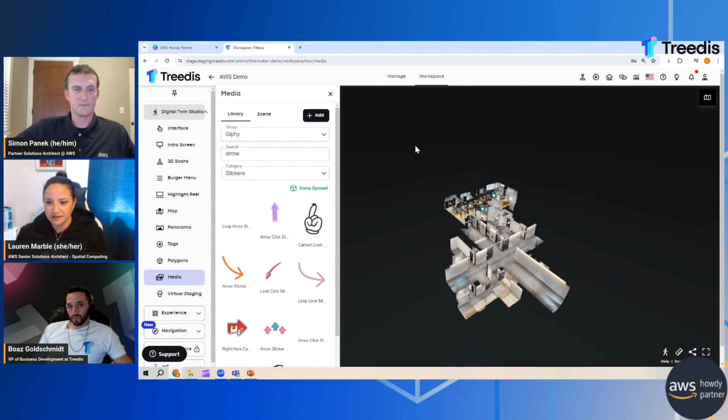Good point. So Treedis, I'm going to run it back a bit. Oh yeah, because I did jump straight into that Giphy thing. It's my fault.

So the Treedis platform, it's okay, you need to add your space. And when you capture a space, Treedis has an integration with Matterport, so we take Matterport digital twins. You would capture your space, upload it to Matterport, and then you have a Matterport link, a URL. When you want to add a space, all you need to do is put in that Matterport URL, which normally starts with my.matterport.com, and then the specific tour.

And then you name it, give it a name. You can also manage a portfolio of clients here. You just add it, and once added, all your tours are here. Then when you click on it, you can start working on it.

Awesome. About how long would you say it took to scan, or do you do the scan? Did you scan this space, or did Matterport scan the space? How does that work? We scanned it. Matterport also have scanning services, so if you want to, they provide what they call a capture service, where you can have a technician come and capture your site.

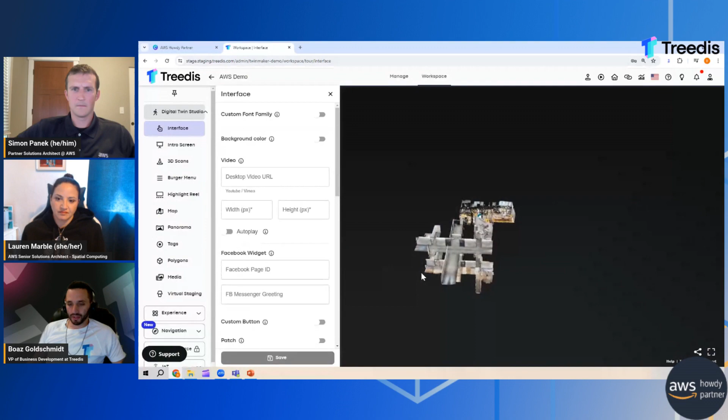It's really quick. I'd say that the office, if I load it again you can kind of see the size of it, this also has a few other floors like the lobby or something. But this didn't take more than like 40 minutes, I'd say, to do the actual scanning with the camera. And then it takes a couple more hours to process and upload.

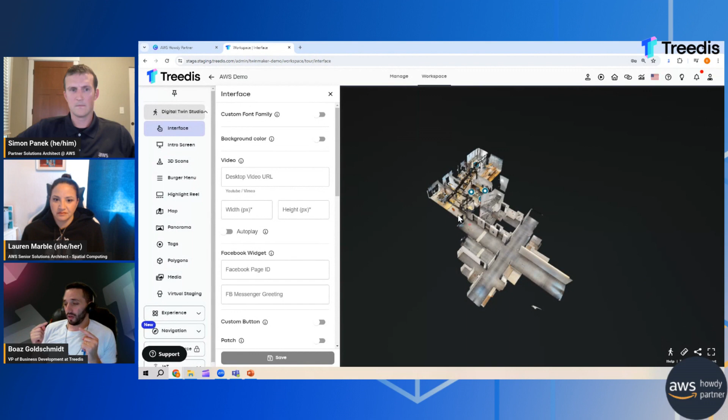But once you have the Matterport link, it doesn't take any time at all to upload to Treedis, it's like a matter of 2 seconds. And then you also have it in Treedis, and you can sync between your accounts so that all your Matterport tours will be there. I know this is pulling from Matterport, and typically you store Matterport scans in Matterport's file format. Can you store those in S3 or some AWS service, or does it have to come straight from Matterport? It has to come straight from Matterport.

Interesting. When you're doing the capture yourself, what kind of equipment are you using? Do they provide a camera? Can you use your smartphone? Matterport does produce hardware, they have a Pro 3 camera, which is actually one of the best cameras out there. But you can also use other cameras like the Ricoh, anything that's able to connect to the Matterport capture app and upload your Matterport space, your Matterport model. They have a list of devices you can use on their website.

Yeah, so we captured our space, uploaded it to Matterport, then uploaded it to Treedis, and now it's on Treedis, ready to work. And then in Treedis, in the platform, we have what we call the workspace, which is kind of where all the magic happens, where all the editing is done, where we create all these things we were talking about in the slideshow. And there really is a lot of features here.

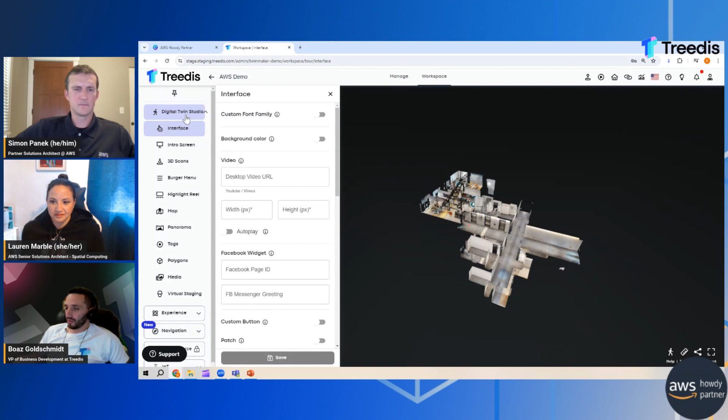Because we understand that one digital twin can provide so many different use cases. You can use the digital twin for training and onboarding, for collaboration tools, for visualization of live data coming from IoT sensors, for indoor navigation. We even have a feature for retail, like an e-commerce feature, which is probably for a different Howdy partner session. But yeah, there's so much to do here, and yet it still feels pretty intuitive and straightforward on how to do it.

I mean, just because we come from the nerdy, not very fun industrial background, feel free to share the fun stuff, the retail stuff. We do have retail partners and customers that'll probably be watching this. So whatever, show us whatever you want, this is your time. Yeah, so I think if we have some time, we can definitely touch on some of the retail stuff at the end.

I wouldn't say it's like the Treedis core focus, but it's definitely something that's on the platform, and we do have users that use it. So I'm going to start with the basics, which is we have this digital twin, and you can see here it's like taking a picture. You kind of freeze a fraction in time, and you have a 3D model out of it, and then you want to start adding the information, adding in these layers and the data.

I think the most simple way to add information is just by adding a tag, where you can see I have a tag here that just gives basic information like coffee or fridge. And to add a tag, we're going to start adding some tags ourselves now. You just go to tags, and then you can place a tag here on the table, and you can name it. Let's call this lunch table, because this is where we eat lunch.

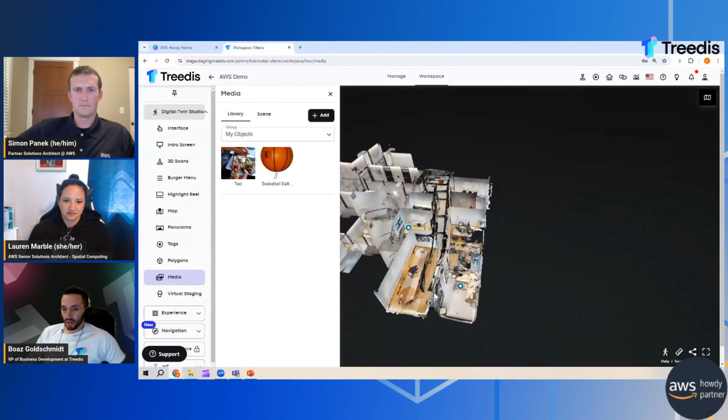Okay, nice. So the office is fairly small, but let's imagine it's huge. We want to know how to navigate through it, and we already added a few tags in the office. So how do we create a navigation tool for users to easily navigate this space? When I say navigate the space, it's both remotely and also physically on site with the mobile device.

For that, we have our navigation feature. With web navigation switched on, users can select a location from the menu and it will show them how to get there - it will navigate them, it will show them the path. How does it look? Let's just open this up here.

So let's say we're looking for the lunch table, and there are different kinds of settings we have here. You can see it's starting to navigate me to the lunch table. Trouble is, it's running me through walls - it's not going through the right area. So it's just going to run me through the wall, and then I'm at the lunch table all of a sudden.

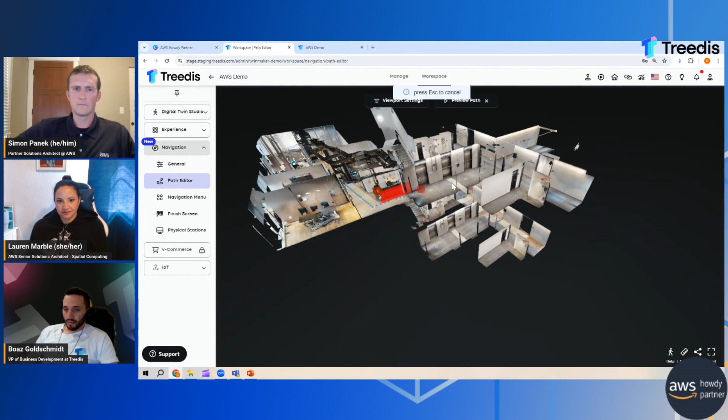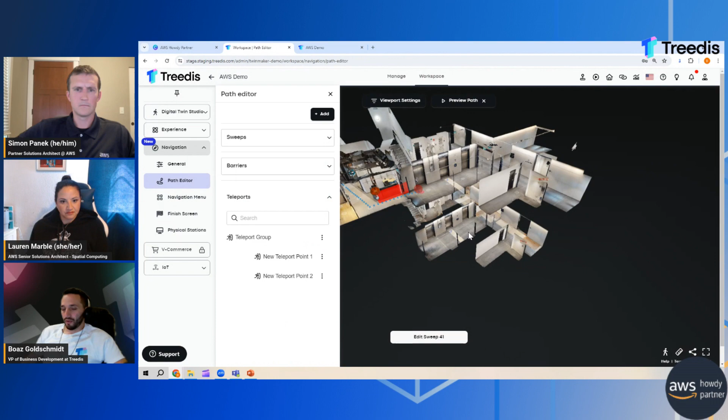We see the elevators in two different floors. And what we'll want to do is make the user teleport from this door to the other door, to the door on the other floor, and see that as a valid route. So what you would do is you would add a teleport group, mark a point, like for example here, and then add another point on the bottom there. And then you can name them - I'll just give them different names so it's easier to understand. And then you have one group, and you know that if the route takes you to this point here, it will continue the route from the other side of the teleport, sort of like a magic gateway, sort of say.

Another possibility to enhance your path is to add scanning points. You can see there's these circles here on the floor that represent the scanning points where the camera captured a 360. So what you can do is you can also add what we call sweeps, or you can modify them.

So for example, if I don't want the navigation to go through sweep number 1, maybe I want it to go through number 4. So I can just delete sweep number 1. Hold on.

What's the use case for this, Boaz? Is this in case a certain sweep has a better view of something you're trying to look at, or what's the idea?

So for example, it might take me through a kind of - I'll show you. Let's take an example from here. Sorry. So for the sweeps, let's do a new preview path. Let's do from here to let's say fridge.

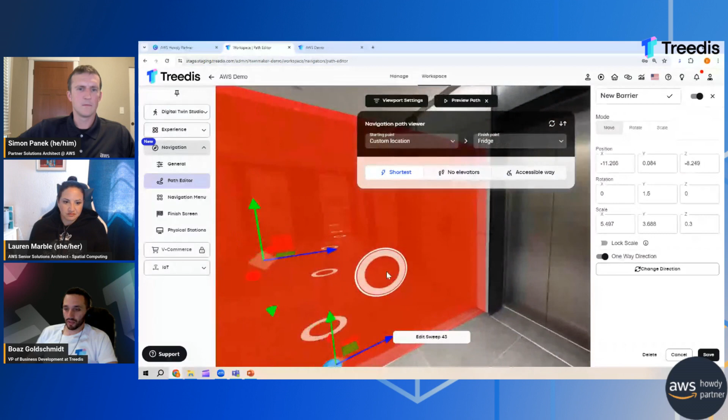Oh, and another thing, we can make the barriers one way. So if there's like a revolving door that you can only access one way, you can actually edit that and make it one way here, for example. And then you see the green way is where you can enter it, and then you can come through the other side. So I can change the direction of that, for example.

So for the sweeps, for example, you can see here that it's kind of taking me here and then going to this one and then sending me back from this kind of route. So I might want to cancel number 41, or I might just want to add a sweep here and say, just connect me through this one.

So that was 39. And then I can edit all the neighboring sweeps of 39, and I can add this custom sweep to make it work with that one. So if I delete all the neighboring sweeps, then it's just going to skip navigating on that sweep. Let's refresh this.

So again, if I go from here to the fridge or coffee, then it doesn't take me back that way. First of all, it doesn't take me through that barrier there. But I can also modify the line - it's basically just for aesthetics, just to make it have the exact location.

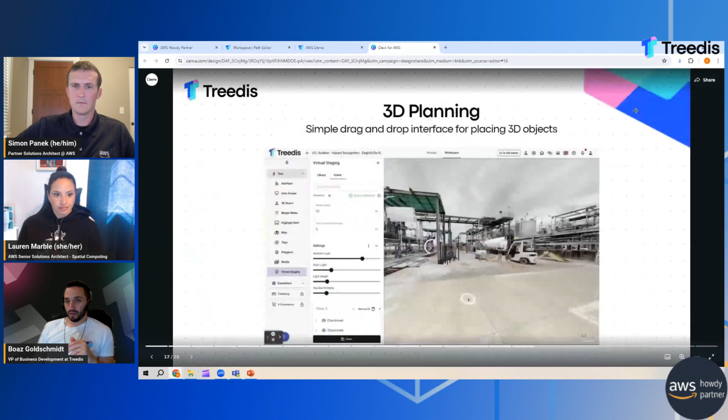The next level, and here you can also see the kind of navigation, the next level of collaboration is, like you asked, remote support. So instead of communicating in a thread, now they're actually going on a live session together with on-screen annotations where someone remotely can say, yeah, you have to pull this screw out, you have to switch this light bulb or so on. And then they're live in it.

And there's also a possibility for, if everyone's remote, then you can have this kind of training session where everyone logs into the digital twin with an avatar representation so that I can see what other people are doing, what they're looking at, where they're walking in the digital twin. So to answer the question, the answer is yes, it's possible. Thanks.

Okay, so we spoke about navigation. Now let's talk about how we build sort of like a training module or a step-by-step guide. And the way to do so is with our experience creator, what we call the experience creator, which I can drop here a teaser.

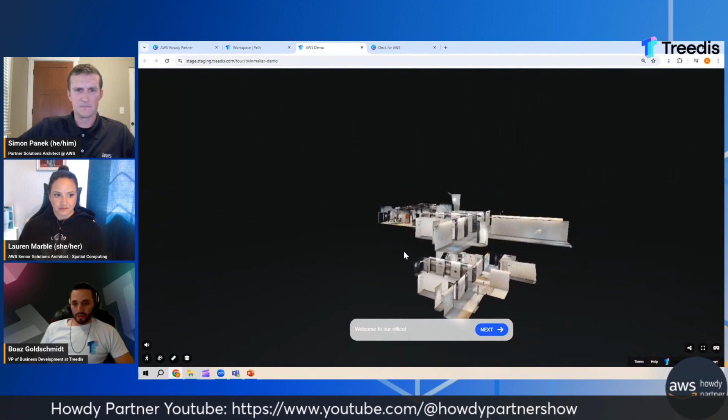Yeah, so there are different buttons there. We can take a look at them now. The first one is the dollhouse, which gives us this preview where you can see the entire model. Then we also have the floor plan - do we have the floor plan here? This one. There's also a floor plan mode, but it's switched off.

And then, yes, there is a possibility to take measurements. So I can click on this measurement tool and add a measurement. Wait... oh, there it is. Where's it gone? So these are, I mean, all these icons are Matterport features.

The measurements tool, the dollhouse, the floors where you can jump from one floor to another. Let's play around with it a bit. One second. Let's refresh this.

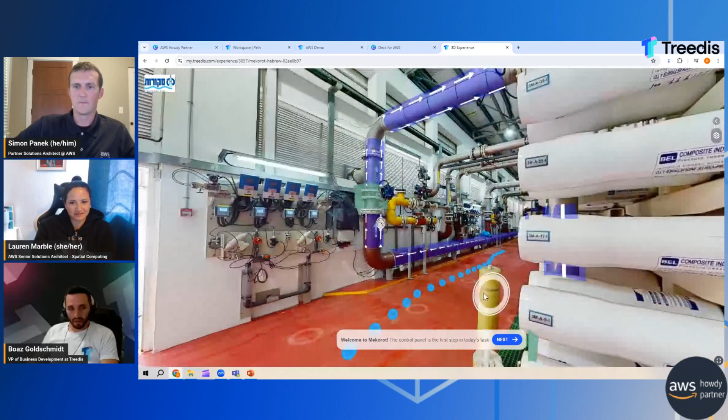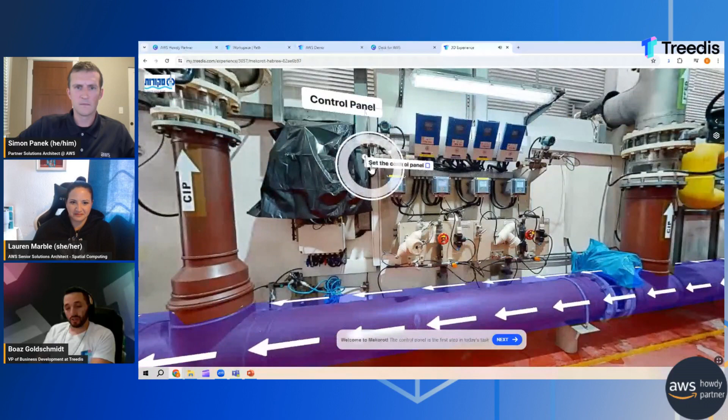What I'm pulling up now is because I just wanted everyone to see how the actual step-by-step process feels in a more professional environment. This is a water utility site, so a lot of pipes and stuff going on - we'll talk about the IoT after this. You can see how I click next and it takes me to one step, then for example step one is to set the control panel, and then I can see an actual tutorial video on how that's done.

There's a video coming up here that I can play, I'll just mute that. And then it will take me to the next step, and so on. If I get lost, I can always click on the next button here on the navigation path, which indicates to me what the next step is that needs to be done.

And here we see another Giphy animation indicating exactly where I need to work. So it all kind of comes together, like the things we've been touching on - with the animations, with adding images and videos, with adding the step-by-step guidance. It all comes together for one cohesive training module or maintenance SOP.

Somebody asked in the chat: wait, are there photos of the restroom too, at the Treedis offices? No. I think it looks like somewhere - maybe they think one of the rooms here is the restroom. I will say, from using Matterport scans, you can blur those out - if you know, this is not a restroom, but there are definitely features you can use to eliminate any sensitive spaces for areas you don't need. Interesting, I don't think we ever captured the restrooms, but maybe it's something we should explore - creating a training module on how to use the toilet. Some people might find that helpful.

All right, so we spoke about indoor navigation, we spoke about building step-by-step guidance. I think now we can talk about the star of the show, which is the IoT connectivity. And there's no better IoT platform to connect with than the AWS IoT TwinMaker.

Agreed, we're glad to hear that. Yeah, well, I mean, come on - it's obvious, right?

So in our IoT section, you can see that I can add IoT sensors. Obviously, factories have many different IoT sensors streaming data from machinery, and some of them might be on different platforms.